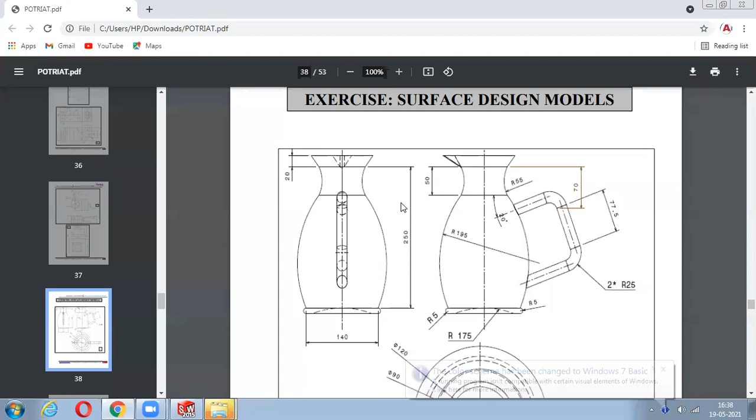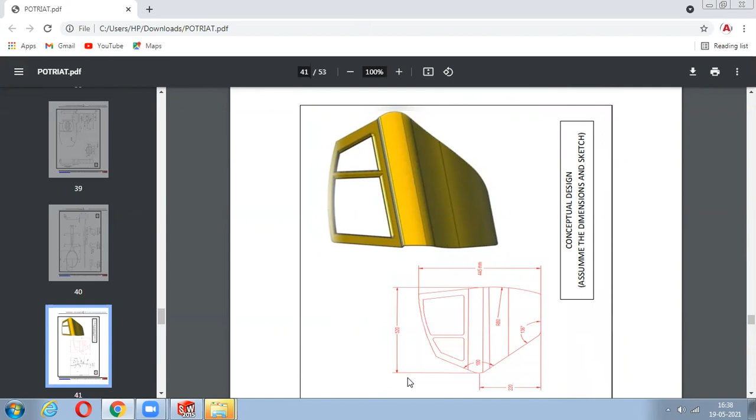This is the first design of your surfacing. So you have a jug, you have this drill profile, and you have this badminton racket and this door. While doing this door, don't worry, it's a conceptual design. Assume the dimension. The only thing is you need to create this line. You just extrude this, take a plane, create this profile. We use project curve, project it, trim it off. It's quite easy.

So shall we do this? Shall we go with this jug profile? Yes, sir. Okay, so it is quite easy. It only works with the revolve and your sweep.

See, what I have to do is I have to create this profile first, and I'll revolve it. I'll give it the shape of a jug. Then I'll just create this line, and I'll make it as a handle for this above part. So for this part, you have to use lofted boss base. I'll explain you how.

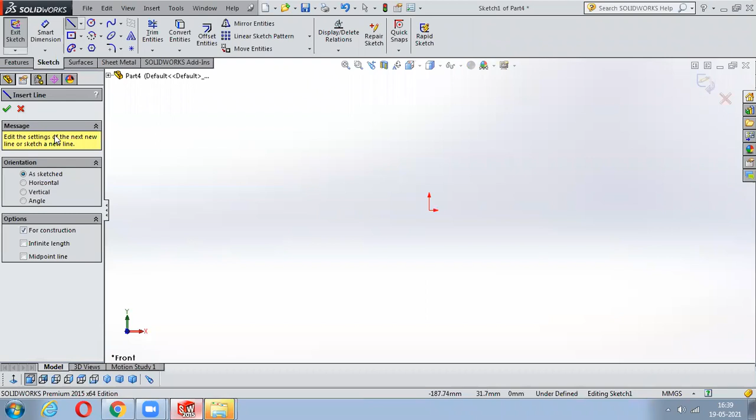So just go with SolidWorks. I'll go with the sketching part. I'll select this plane. I'll go with this infinite length. I don't know how much the length is. So at the same time, I'll go with a vertical line. I'll say okay to this.

So now I'll just work with this 3-point arc only. First of all, I'll create and give a shape to this. So now I'll just see, and I'll create this above arc also. So it is something like this.

Now if you go on looking at the dimension, see it has given the radius as 195 and 55. From here to here he has given it as 50, and the overall length he has given as 250. So that means from here to here it is 200, and from here to here it is 50, 195 and 55.

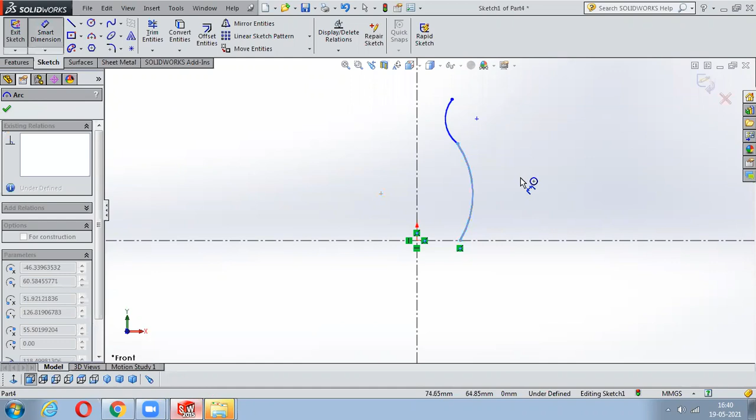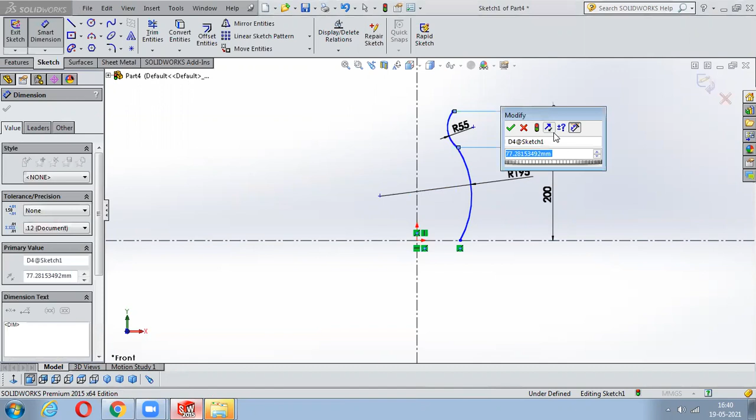So I'll go with smart dimensions. This one is 195, right? And this one is around 55. And the height from this point to this line he has given as 200. And from this point to this particular point he has given it as 50 mm.

So now it comes to calculate from here to here, so the distance you'll get is here. See, he had given it as R175. You can notice from this point to this point he has given it as total 140. So now what I'll do is take half of the dimension, right? So I'll go with 70 now.

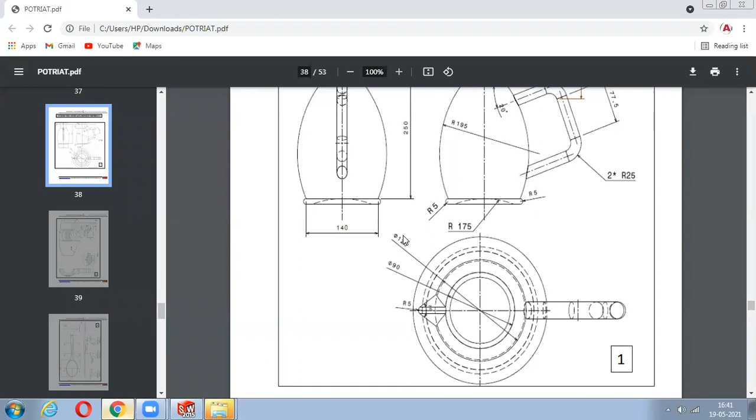So now I have to assign the distance from here to here. For that, see here you can notice he had given it as 90. So this 120 is for this upper one, and this 90 is from here to here. So that means he has given it as the diameter. That's why I'll just go with the dimension from here to here as 90. What is half of 90? 45. Okay, so now you can see the shape has changed.

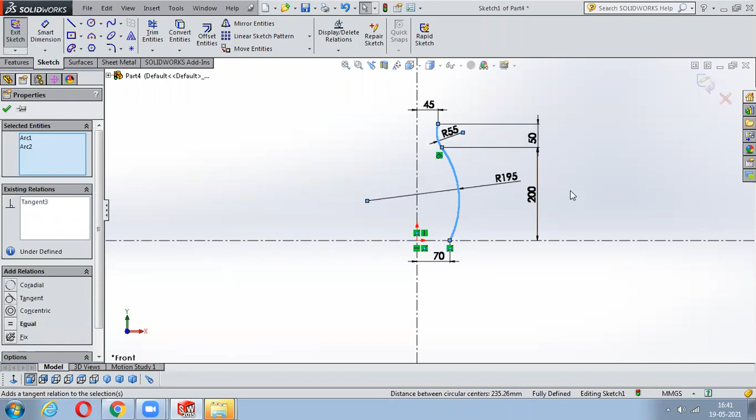So what I'll do is make them tangent. Just hold the control button, select these two curves and make them tangent. Okay, so now the sketch is fully defined, right? Yes, sir. Any doubts? No, sir.

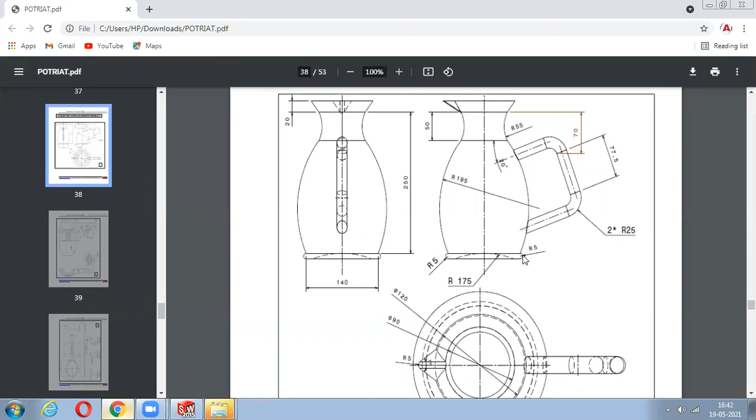Okay, now to create this lower model, that means to close this profile, wait, I'll just zoom it here. See here, we have an R5 circle from here to here. There comes a flat line, then it is traveling with an arc, again it is becoming flat. So that means I have to create this.

That means from here to here I have to create an arc, a straight line, then go with an R5 radius circle. Okay, so to do that, first of all I'll just go with this 3-point arc again. I'll create it something like this.

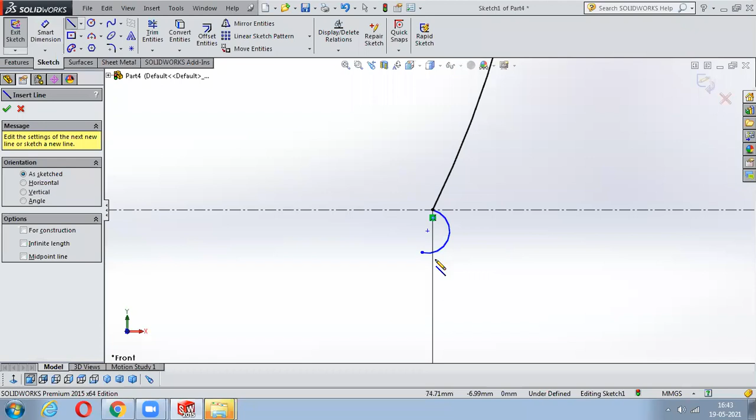Now what I'll do is create a line, exactly a horizontal line. So now again you need to create an arc, a 3-point arc from here to here. And it is something like this.

He has given the arc radius, so that is nothing but 175. At the same time, just drag it and make it look how it was before.

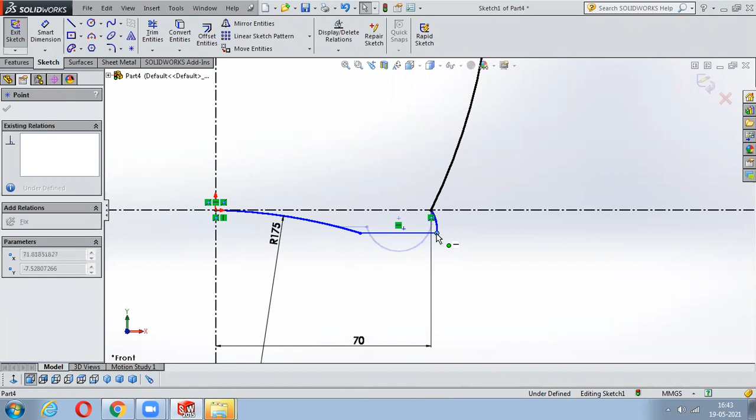So now assign the radius to this circle as R5. Now just give the length to this, I'll assign it as some 10 mm. So now you can notice again it has changed the shape. What I'll do is hold the control button, select these two, and make them tangent.

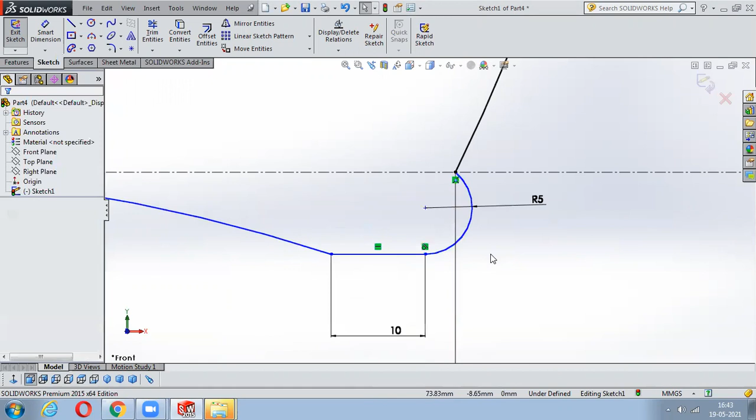Now everything is great, but it is not fully defined. So just because this circle is moving, to make that circle fixed, what I'll do is I'll just hold this control and select these 2 points.

So what is the issue coming here? Just try and drag the things, you'll get to know. See, it is moving. So that means it is not fixed.

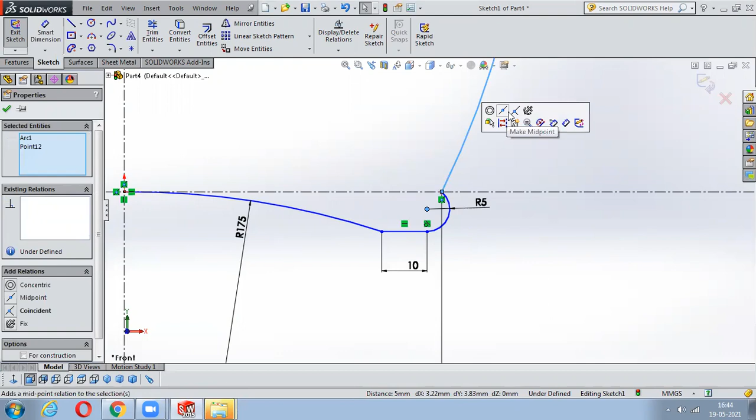So why it is not fixed? I'll just select this endpoint and this line and say make coincide. That means this exact center point will get coincided, so it will follow this path and it will be fixed. Got my point? Any issues?

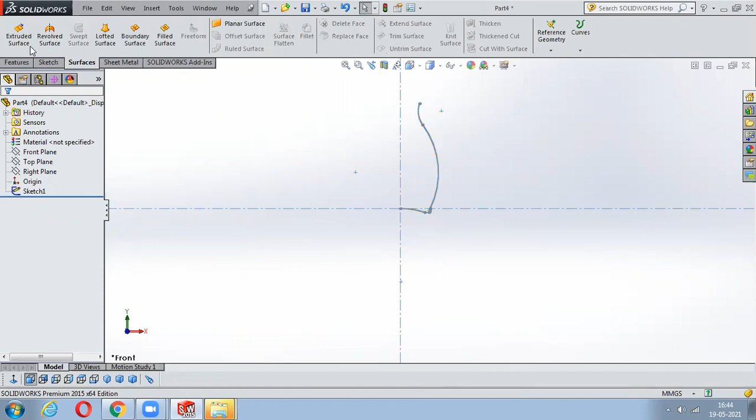No, sir. Okay, so once it is done, you can see the sketch is fully defined. Just say exit to this and go with revolve surface, select the axis and say okay. You can notice this part has been done.

And now to create that upper part, you need to be careful here. So for that upper part, can I just move it like this? Yeah, see. So I want a plane 20 mm above.

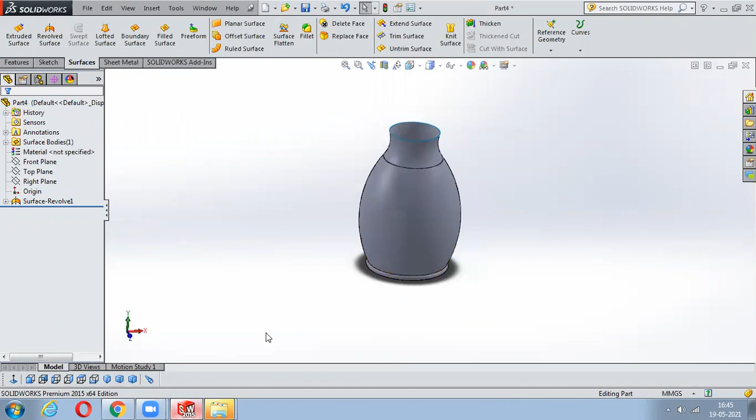So that means till here we have completed. Now I want this 20 mm above. To give that 20 mm above, what I have to do is get a plane there first. So I'll go with plane, with this top plane here.

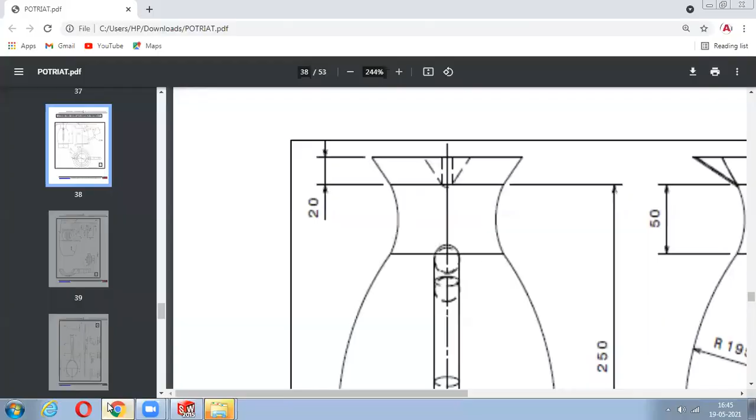So what is the distance I have to take here? What is the distance of offsetting the plane I have to take? By looking at this, can you get an idea? What is the distance I have to take? Just look at this and tell me what is the distance of that offsetting plane I have to take.

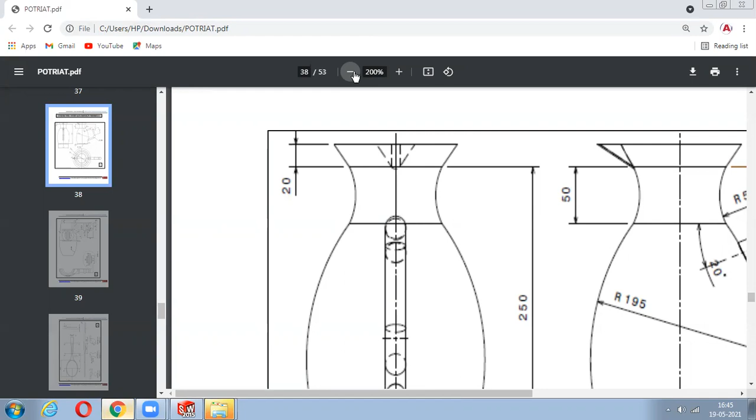Faizan? What is the distance I have to take? Meghana, Chetan, Ravi, Samir, what is the distance I have to take? Anyone? Meghana, are you hearing me? Can you hear me, Meghana? Sir. Yeah, then tell me what is the distance I have to take from here to get a plane? My God, I don't know why you guys are feeling difficulty.

See, the plane is here. So that means the plane is exactly here. Okay, so if I want to get a plane here, what is the distance I have to take from here to here? 270, 270, 270. Very good. It took a lot of time. Okay, so 270. Just type it here as 270.

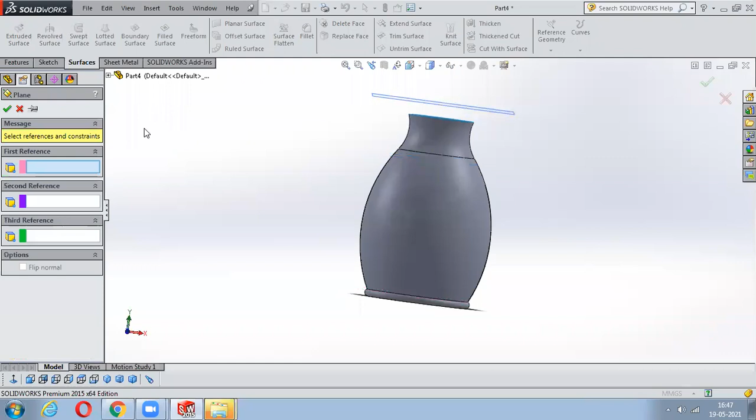Okay, so that means you got a gap of 20 mm here. At the same time, I want a plane here also, just because I have to create a sketch here. So again, to do that, go with plane. I'll select the top plane. So it is a 270, so I have to take it as 250, right?

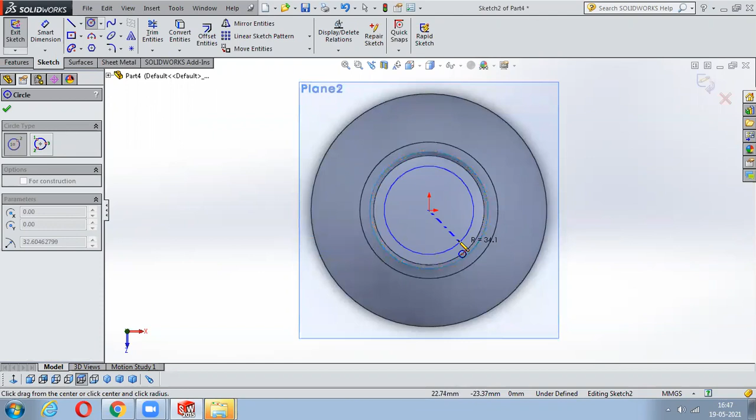Now what I'll do is I'll just select this, go on sketch, make it normal to this, and I'll create a circle of same length which matches this. So that is nothing but it should go with the diameter 90. So once it is done, I'll just say exit to this.

Now what I have to do is, see, this is a major important part here, be careful. So you have to create this part. Did you guys see these jugs and all, right? I guess I don't need to explain how the jug looks like actually.

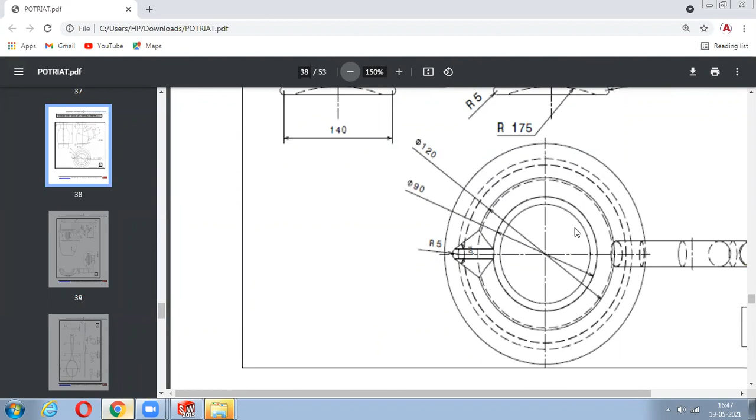So now at the top, see, you can notice at 120 dia of a circle, you have to create this part. So circle, and it should follow. At the same time, we can notice the lines are being followed to the smaller circle of dia 90.

So to create that, first of all, I'll just select this plane and go to sketch. I'll create a circle of dia 120. So it should be at 120.

Now I need to have a center line from here to here. So what I'll do is take a line command from here to here, just don't let it be tangent to it. From here to this point, at the same time select a line from here to here and leave it. Now the major important thing, just make them symmetric. Hold the control button, select these 2 points and this middle line and make them symmetric.

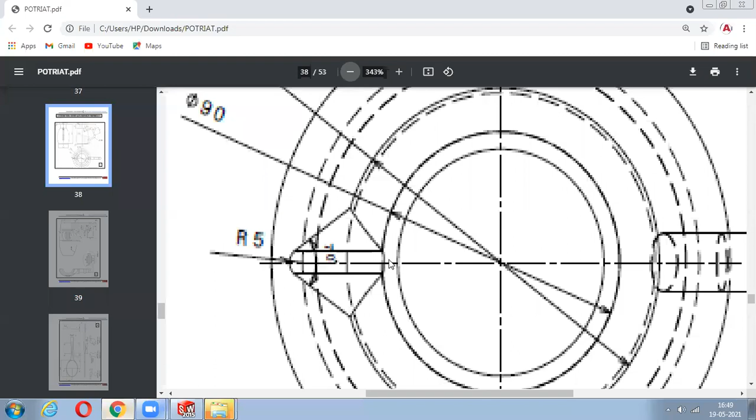Now maybe some dimensions are missing. See, here he has given R5 and angle as, I don't know, 70 degrees. So now what I'll do is say okay to this. Now assign the smart dimensions from here to here as 70 degrees. So it will be expanded.

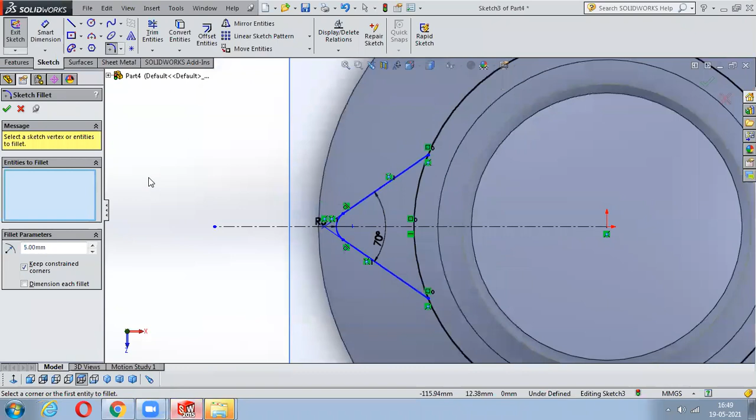So now I have to make a fillet here. So fillet from here to here with radius 5 mm. Once it is done, if you want to make the sketch fully defined, you need to assign the horizontal dimensions. To give that, just select this one and this line and I'll assign some 80 mm.

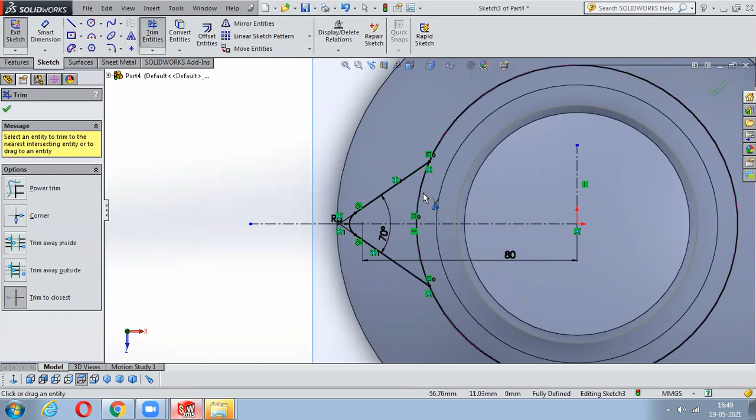So once it is done, what I'll do is I'll just trim off this. I don't want this. Okay, so once it is done, I'll say okay, and exit the sketch.

Now I have created the upper part, but if you want to connect this upper part with the lower part, you need to have 2 points here. So to create that point, I'll just click on the sketch, say edit sketch again, and edit the same sketch.

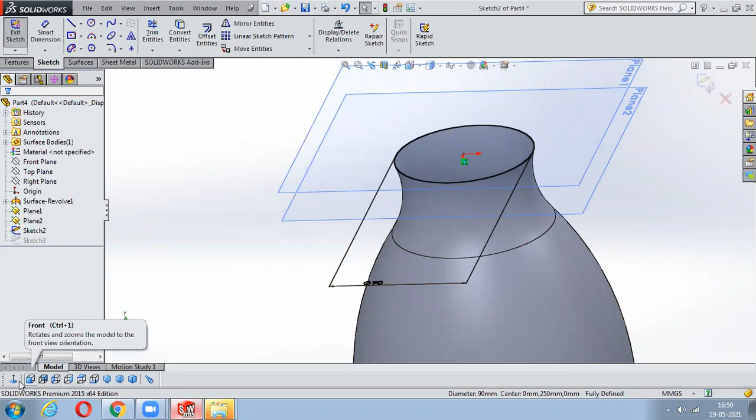I'll just make it normal to. I'll take a center line from here to here. Just click on these points, create a point here and here. So just create, after creating 2 points.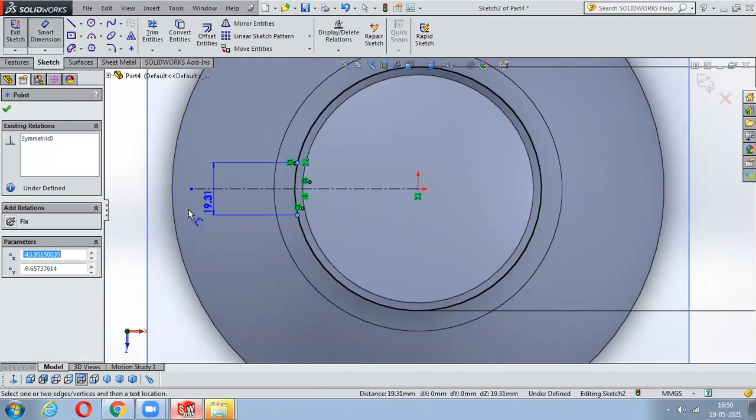So just delete this guy. Now what I'll do, I'll hold the control button, select these two and this guy and make them symmetric. Again, I'll go with smart dimension, select these two and assign the dimension as some 10 mm. I'll say exit to this.

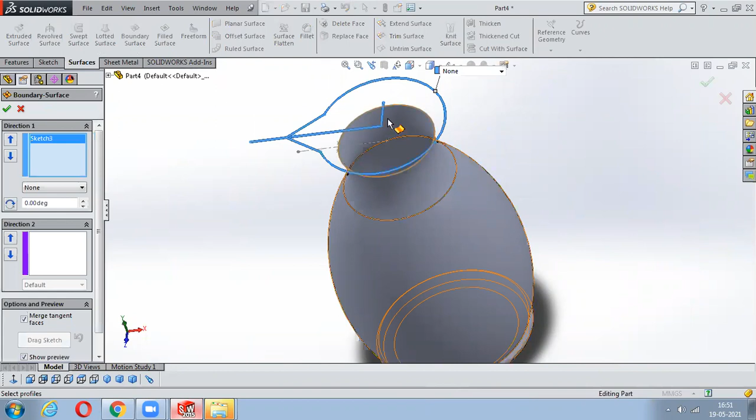So once it is done, the real things come in action. I'll just hide this plane so you can get it clearly. Now what I'll do is go with this boundary surface. I'll select this— sorry, I'll go with the points, select this point and this point. See, you can notice it's coming, but it is being twisted, right?

So to avoid that, now what I'll do is create a line from here to here. So just go with curve through reference points. Create a point from here to here. Say okay to this. Now just go to lofted boss base.

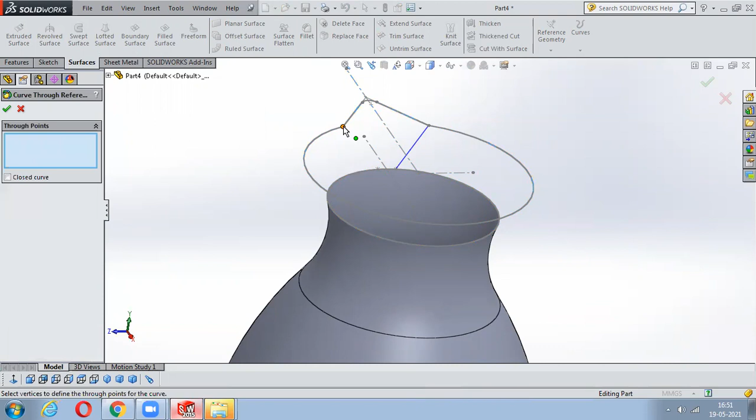Select this sketch and this sketch. Go to guide curves and select this one as your guide curve here. Okay, so now why is it not coming? I'll just go with 2 guide curves. So now again go with curve through reference point. Select this point, this one, and say okay to this.

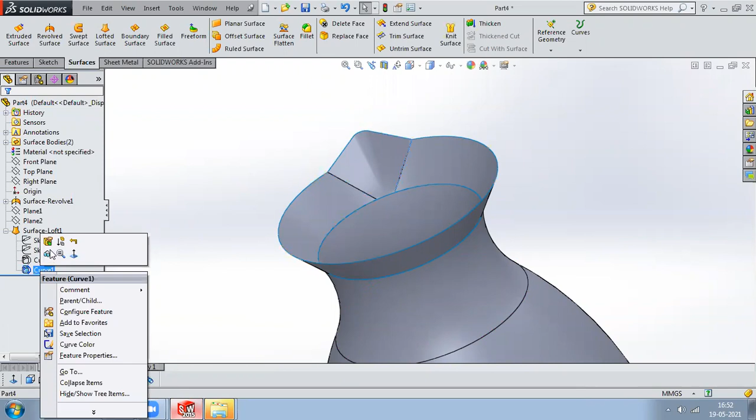Just go with lofted boss base. Select this and this one as a guide curve. Select this, this— see, once you select those 2 guide curves, the material will be added and you'll get the exact jug shape. I'll just hide these two. Got it? Any issues, any doubts?

No, sir. Okay, so the last and easy part is creating a handle. Just select this front plane and try to create a handle opposite to this direction. Don't create here, or else you'll know how difficult it is to pull out the water.

So now what I'll do is create a rough line here. I'm not going with the dimension right now—once you're doing it, you guys should go with dimensions, okay? I'm just creating it roughly. Once it's done, just make some fillets here, some 25 mm.

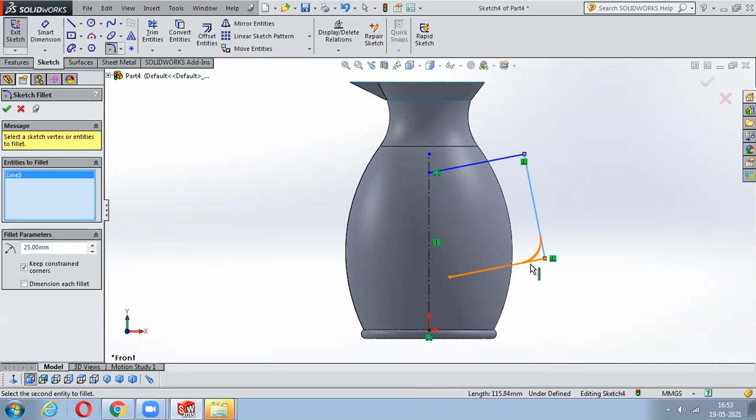So once it is done, just say exit to this. Now the major important thing is you need to take a plane here. To take a plane reference geometry, try to see which plane is suitable. This plane is suitable just because it's coming exactly perpendicular to this line.

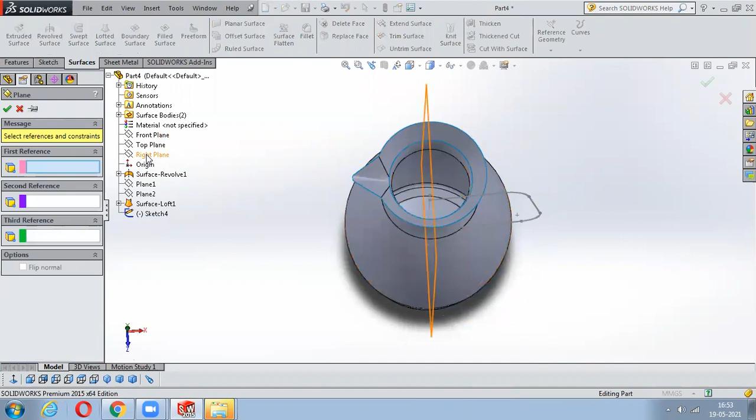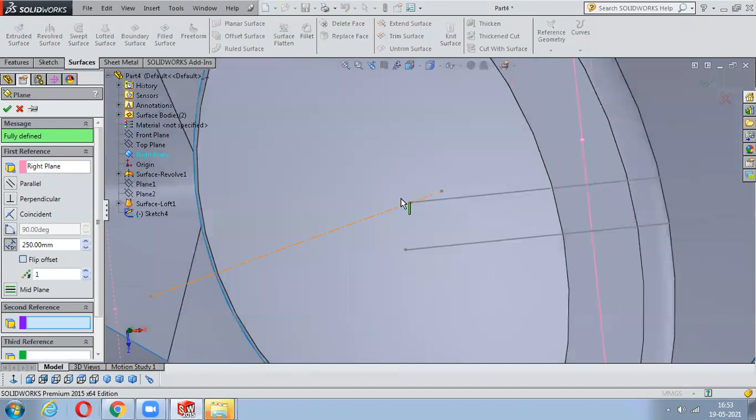See here. So once it is done, just select this and select the starting point of that particular line—oh sorry. Just try to select the starting point of that. Just a second, I'll go with reference plane, the right plane. Why is the point not coming?

Just select on this point and say okay to this guy. Now just select that plane, go on sketching on that plane, make it normal too. You can notice where the exact start point is—here it's the start point. Just give a circle of some radius.

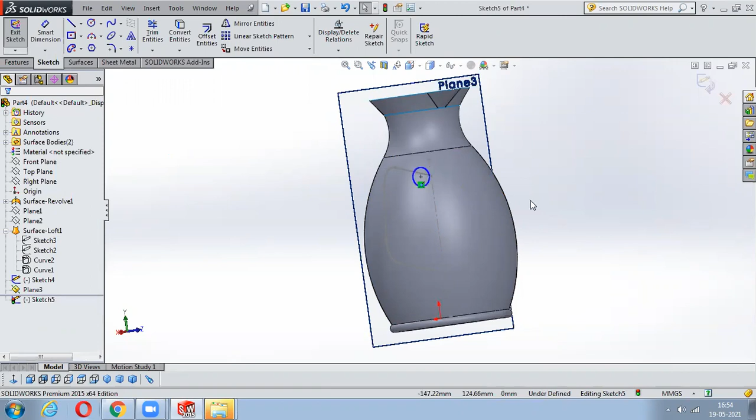If you want to just create it here, you should hold the control button, select these two guys and make them coincide. Once they are coincided, say exit to this, and you know this swept. Select this and this path and say okay to it. If you want to remove the inner material, go with trim surface.

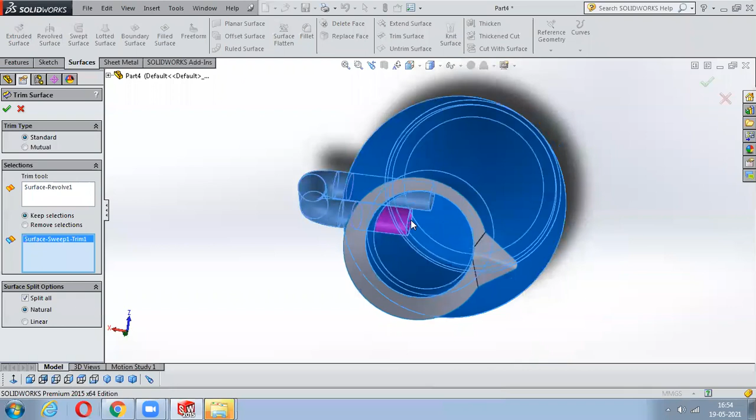So trimming tool will be this. Just select this and this. Select as remove selections and say okay to this. So the inner material will be removed and your jug is ready. Got it? Any issues, guys? No, sir.